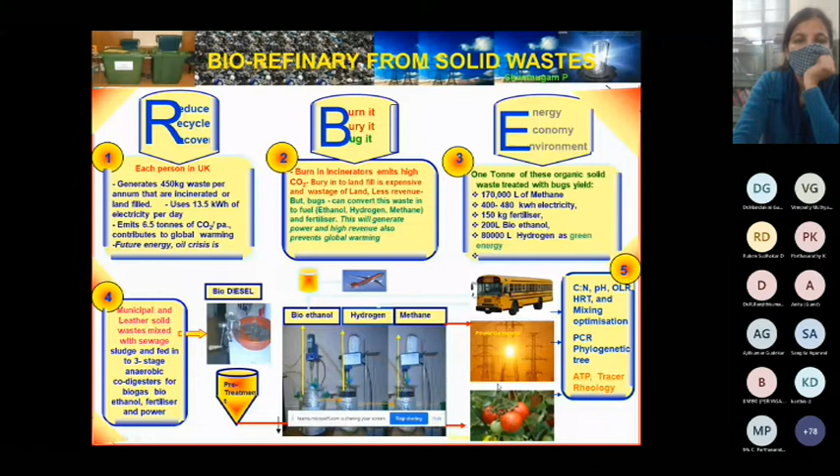So therefore, finally, these fuels, the biodiesel can be blended with the original diesel and be used in the cars and buses and automobiles. The bioethanol can be used in the automobiles, and the hydrogen can be blended together with the methane and can be used in automobiles, or separately also can be used. And the methane can be again used as a compressed biomethane.

Probably you all know many cities in India, we have demonstrated a lot of compressed biomethane plants. And that compressed biomethane plant is after purification of the biogas, and we enrich the methane by eliminating the carbon dioxide, and that becomes equivalent to a natural gas, like a compressed natural gas. It becomes compressed biogas. So therefore, this is the R cube into B cube into E cube concept that I have been demonstrating.

We are looking for any organic waste, it emits a lot of carbon dioxide if it is completely degraded or completely combusted. When it is completely degraded, only a very less quantity of carbon dioxide is released in the aerobic or in the anaerobic system. But when you are combusting in any automobiles, if you completely combust it, the end product is carbon dioxide. You might ask me a question, sir, ultimately efficient combustion leads to carbon dioxide. Inefficient combustion leads to carbon monoxide and unburned hydrocarbon, which is toxic to the human being.

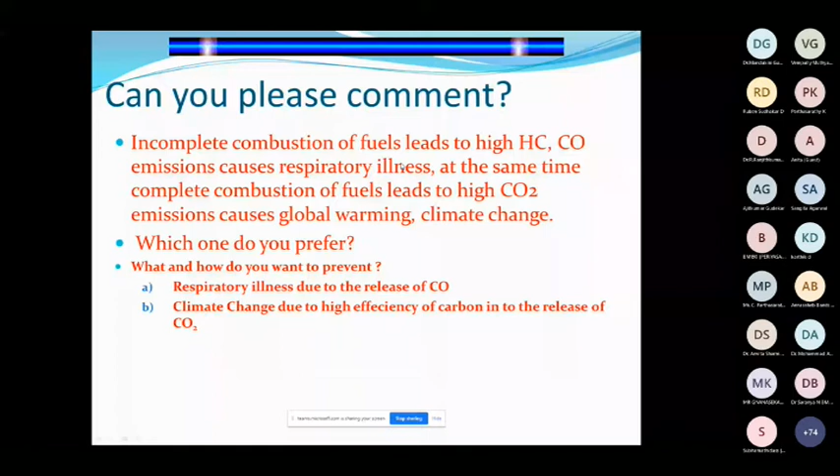Therefore, we must have a carbon neutral technology, whichever the technology, either it could be a biodiesel or biofuel or a bioethanol, or biohydrogen or methanol economy, or any kind of fuel production from the solid waste. We must look into a carbon neutral technology. That's the reason I'm bringing it down here. So how do you select the solid waste management or the wastewater treatment, on what basis? So normally, is the prime focus that you would develop the waste management system to achieve environmental compliance alone? Not only to achieve that. Is it only for revenue generation from solid waste management or wastewater treatment technology?

Not only that. There are PPP modes of solid waste management these days, because the electronic waste, the biomedical waste, and the organic solid waste, all these wastes have become a wealth, have become a rich revenue generating raw material. As a consequence, there are a lot of companies who have come forward to put it up as a public-private partnership mode these days. But I wouldn't say so. The PPP is a public-private partnership, but we must attempt PPP as profitably preventing pollution. So how do we prevent the pollution in a profitable way? Profitably preventing pollution is more important than the public-private partnership.

So we must look into what is the revenue-based waste management system. We must look into what exactly a revenue could be generated from each bit of the waste. Then only the waste management system could be attractive, and people will definitely follow it, because as a part of the management policy, we have a water tax and we have an air pollution tax for industries, and we are also going to have solid waste tax as a part of the cess tax.

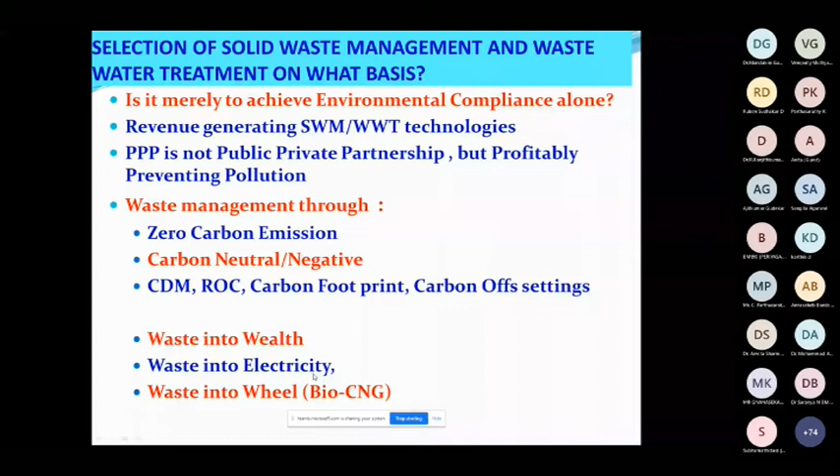So if you look at the natural greenhouse gas effect, when you do an open dumping of the waste, what happens? This waste, when it is putrefied, releases a lot of fugitive emissions of CO2. That unaccountable fugitive emission of CO2 becomes a big culprit for greenhouse gas emissions. Every city has got mountains of waste being dumped. In the rainy season, it is wet, bacteria come in contact, it gets degraded and emits a lot of carbon dioxide and greenhouse gases to the atmosphere. As a consequence, we got into a greenhouse gas effect.

And this solid waste also creates groundwater contamination, because in every city in India, or probably in the world, most urban dwellers are drinking distilled water in their homes. Why are we so? What happens after a few years if there is no mineral water available, no RO plant available? Which water are we going to drink if we already pollute the groundwater because of open dumping and leachate of toxicants from the open dumped waste into the groundwater?

After 10 years, it becomes a serious problem for groundwater resources if we don't protect ourselves through bioremediation of the leachate, bioremediation of the contaminated land, or bioremediation of open dumped land. In every city, there are acres and acres of open dumped landfill sites to be reclaimed or remediated to protect against groundwater contamination problems.

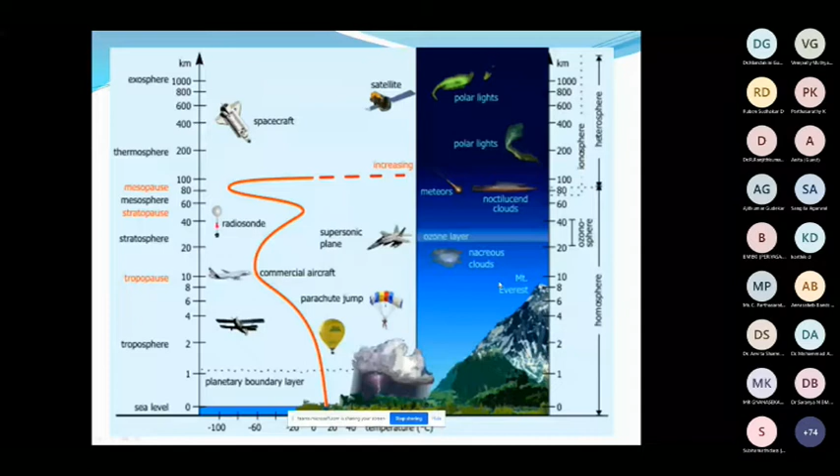So these are the pollution problems due to burning and greenhouse gas emissions. Of course, you might ask whether India is facing the greenhouse problem or not. You might see why frequent natural calamities are occurring, particularly in Chennai. Every December, there is a flood in Chennai. Every December or around this period, there is an earthquake in Indonesia. There are tsunami warnings.

Why is that happening so frequently in the recent past? We, the intellectual faculties and professors, all have to think it over and formulate technology to mitigate global warming, greenhouse gas emissions, and also the tsunami problem. I do understand tsunami and earthquakes are natural phenomena. But to a very meager percentage, we tend to presume tsunamis to be climate change related, because the occurrence in the recent past has become very frequent, which did not happen before. Hypothetically, it has not been proved that climate change is related to the tsunami problem.

I feel so. Whenever climate change happens, whenever greenhouse gas emissions are exorbitant and global warming takes place, as a consequence, the warming melts the frozen ice in the Arctic and the Antarctic.

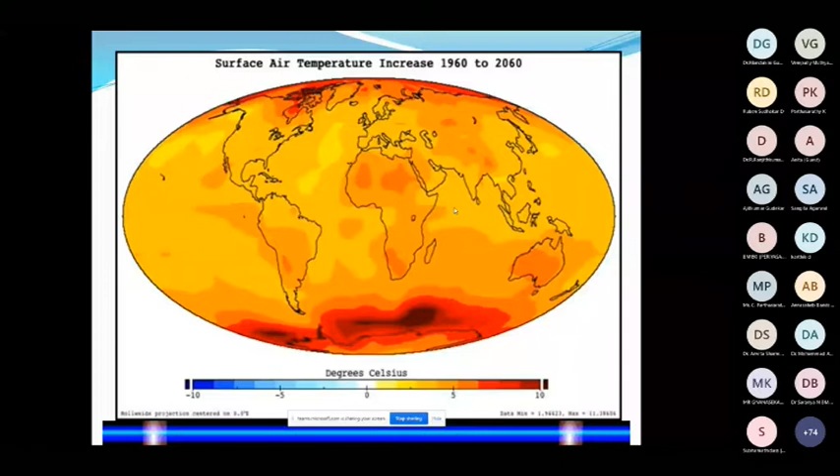because if the carbon is completely converted into energy, then the path of CO2 becomes very, very less, because most of the fuels are used in the process of automobiles, and therefore the CO2 emission is less. So that is what I normally consider and make a small relativity hypothetically between the greenhouse gas emissions, global warming, and the natural calamities.

and changing the conditions of the plants and animals, and more drought and wildfires occur, more precipitation in some places because of the greenhouse gas emissions, and stronger storms, stronger wind, stronger cyclones, and rising sea levels, and the earth absorbs more energy. So therefore, there are a lot of other imbalances in the energy budget. And that is the importance of the greenhouse gases and trapping this energy. So therefore, we have to balance the emissions of carbon dioxide and protect the earth through a balanced system.

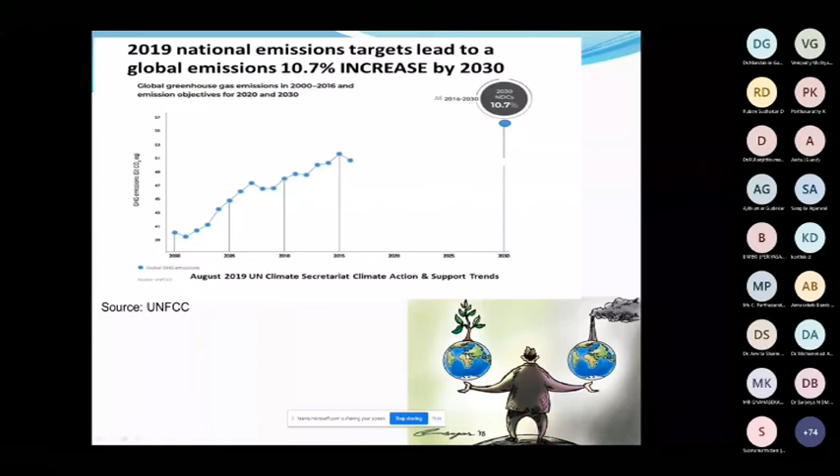So the CO2 emissions from the combustion process, and the CO2 emission from biogas combustion, it is relatively very, very low when we compare the CO2 emission from biogas, because ultimately somebody might feel that we are producing carbon dioxide, we are producing methane, and the methane during the combustion process is converted into carbon dioxide. How do we say it's a carbon neutral or carbon negative technology?

But when you replace the coal, because the burning of 1 kg of coal releases stoichiometrically 1.6 kg of CO2. But if you produce biogas, 1 meter cube of biogas or 1 kg of biogas is almost equivalent to 1.5 kg of coal. So when you are using the biogas for a combustion engine, IC engine, or for cooking gas, or as an automobile fuel, you are replacing the coal equivalent of 1.5 kg, which is equivalent to 1.9 or 2 kg of CO2 that you are mitigating.

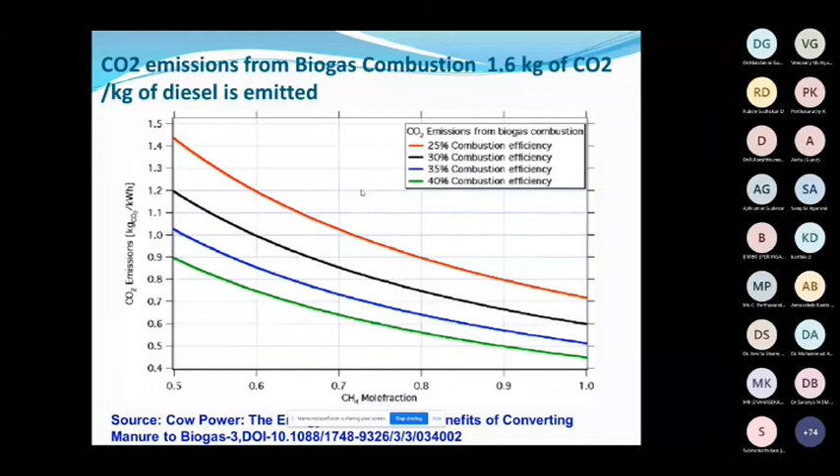So therefore, the indirect benefit of biogas production from the waste material is the reduction of the consumption of coal. And not only the reduction of the consumption of coal, but the coal equivalent CO2 emission in thermal power plants, we are able to mitigate it. That is the carbon neutral technology we could achieve. So that is the reason finally I say well-to-wheel comparison and waste-to-wheel comparisons.

So the CO2 emissions from the combined heat and power project, you all might feel, the biogas production, how efficient is it, is the first question you might have. I could have a good answer on that. And how combustion efficiency can be achieved, I will have a very good answer at the end of it.

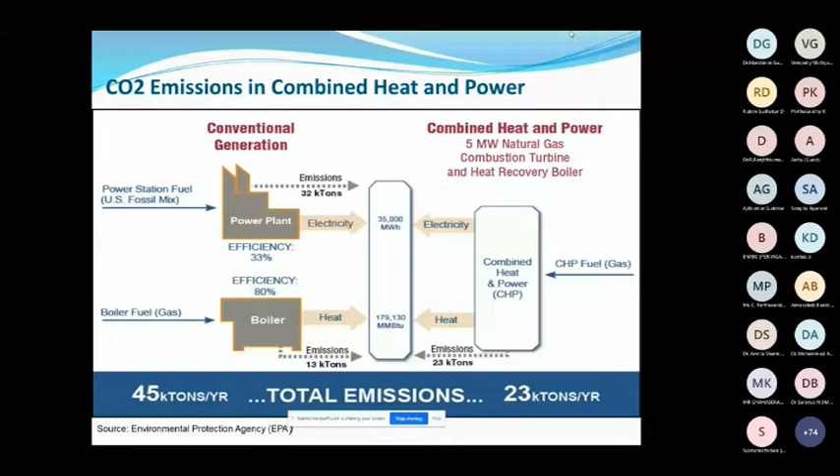And how the thermal conversion efficiency is comparatively better in the gaseous fuel than compared to the liquid fuels like petrol and diesel. So we could also discuss something on those issues. This is the CO2 emissions: this is the combustion, gasification, and pyrolysis. We have many techniques, but the CO2 emission in combustion is very high, and gasification is very high, and also

pyrolysis is very high. So carbon footprint calculations from electricity generation, from natural gas, from fuel oil, from LPG, from waste oil; then we can compare any renewable energy technology that we are going to adopt from the municipal and industrial solid waste, and then we can compare the carbon footprint. How much is the carbon footprint from these fuels? How much is the carbon footprint from the biogas, from the biofuel, from the biodiesel, ethanol, hydrogen, and methane? How much will be the carbon footprint we could calculate?

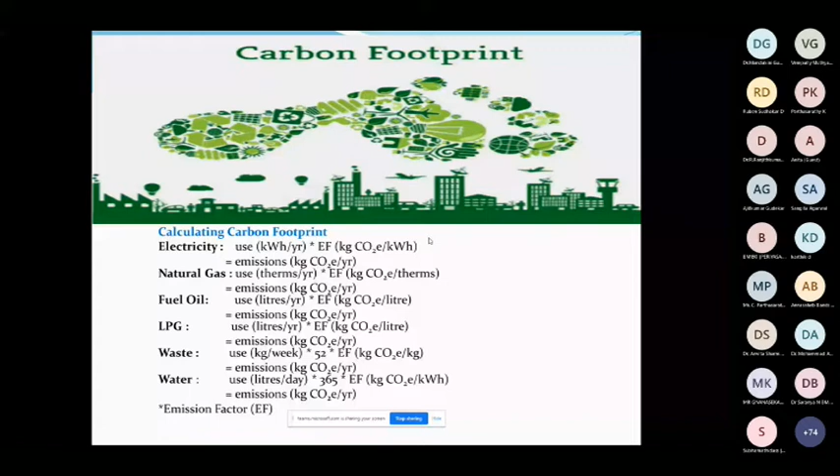And then subsequently, they brought the Renewable Obligation Certificate, ROC. The Renewable Obligation Certificate came in. It was wonderful. When landfill diversification happened, the waste, as much as possible, should go into renewable energy, converting the waste into biogas and renewable energy. That's what the Renewable Obligation Certificate is.

And later on, the next step, they came into the white energy strategy, because the waste can also be converted into CO2-free biofuel like hydrogen, because hydrogen is the white energy of the future and doesn't produce a lot of CO2. Therefore, they brought a white energy strategy.

Likewise, in India also, you have landfilling, you have composting technology, you have incineration, you have pyrolysis, you have gasification; so many waste management technologies are in practice. But what we should practice and what we should promote is which technology can fetch you a revenue, which technology gives you the benefit of revenue coupled with CO2 mitigation, and that technology becomes a carbon neutral technology. That's what I have been mentioning from the beginning.

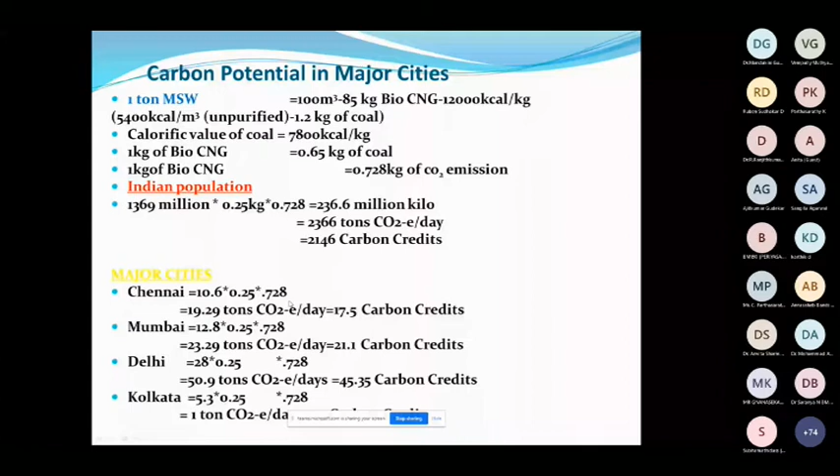For Chennai particularly, it is 17.5 carbon credits per day. And for Mumbai, Delhi and Calcutta, we have certain thumb rules for calculating the carbon footprint, and we have been explaining how to calculate it. So now I'm a little bit on the introductory side: whether gasification is good, or combustion is good, or pyrolysis is good, or biofuel recovery is good. Let us look into how the waste composition demands the technology, and which composition of the waste demands which technology.

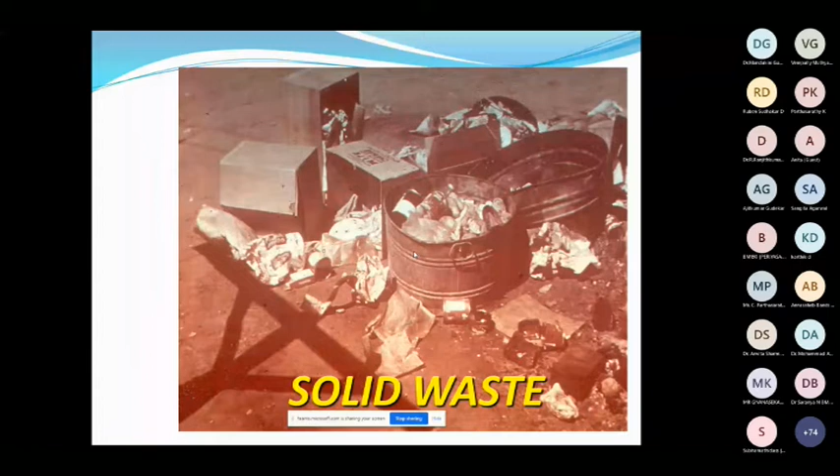And before we actually get into this, I request all of you to go through the Solid Waste Management Rules, Government of India, 2016, which is available from the Central Pollution Control Board. A PDF copy is available, and we all must be aware of the existing solid waste management rules being practiced at the moment in India. So this is what we look at as solid waste. Solid waste is of many categories: hazardous, non-hazardous, combustible, non-combustible.

There are leachable and non-leachable, corrosive and non-corrosive waste. There are many types of degradable and non-degradable, biodegradable and bio waste. Likewise, solid waste is prominently classified as combustible, non-combustible, degradable, non-degradable, corrosive, non-corrosive, radioactive, non-radioactive, and hazardous, non-hazardous.

In the waste category, there is electronic waste, plastic waste, metal waste, organic waste, bio waste, and biodegradable and non-biodegradable organic waste. Papers, rags, and many other waste materials make up the composition of municipal organic solid waste.

So when we look at it, the Government of India has very nicely promoted the integrated waste management park facility. What is called an integrated waste management park?

The solid waste needs to be segregated at the source. If not, the solid waste has to be segregated at the collection center where it has been collected in bulk. Once collected, it has to be segregated as metals, plastics, and so on, and each waste should go into a separate waste processing center.

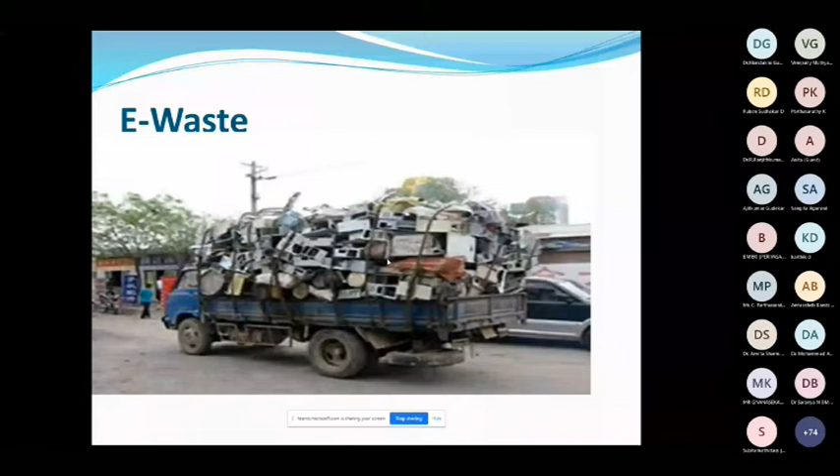We all must be familiar with the Solid Waste Act 2016, and know the environmental health problems related to solid waste, and methods of treatment: landfilling, incineration, open dumping on land or sea, composting, grinding or adding to sewage, and recycling. Integrated waste management is the system we need to know about.

The Solid Waste Disposal Act was very old, and the Solid Waste Management 2016 brought back every item in a very nurtured way to improve disposal technology, improve management practice, support research for new approaches to handling solid waste, and support training programs and federal assistance to achieve this.

I say we must support a training program because if all the municipal commissioners, joint commissioners, municipal engineers, and city engineers are well taught on how this solid waste management technology can be effectively achieved, then the percolation of the technology to the root level becomes very easy.

That's the reason around 2 years back, I conducted a waste management technology training in our institute - laboratory training as well as in-house class training, and also field visits - for 124 municipal commissioners and municipal engineers of the Government of Tamil Nadu.

Since then, the Government of Tamil Nadu, most of the municipal engineers—almost 144 people—attended our institute, and they all benefited greatly about how waste management, particularly waste into biofuel, can be effectively done, and what are the bottlenecks involved. It was a 3-day training program we organized for all the commissioners and municipal commissioners of the Government of Tamil Nadu.

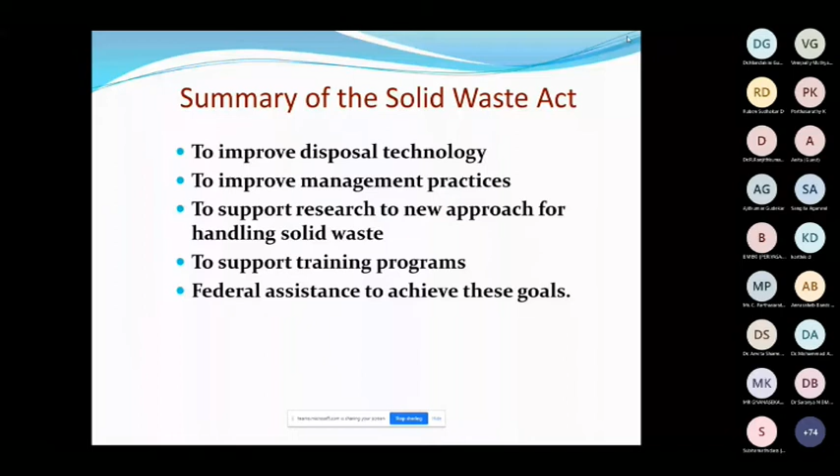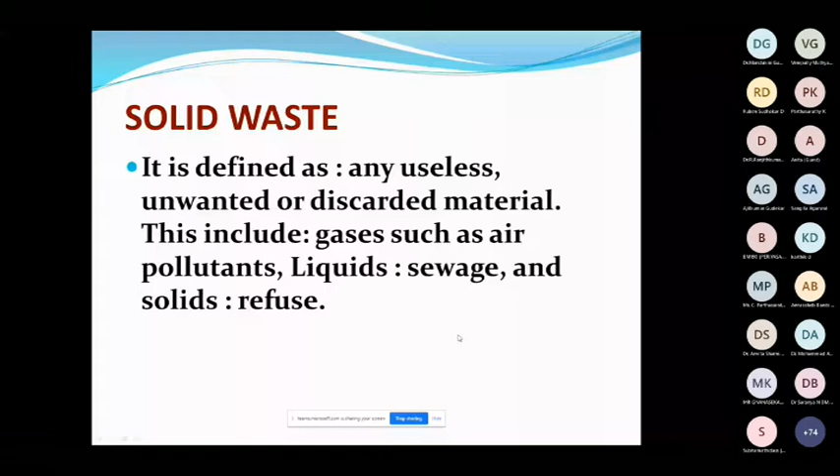Solid waste includes sludge as well, since it comes from the sewage treatment plant. There is a lot of hazardous and non-hazardous waste, and biodegradable material—waste material capable of being broken down biologically or by biological enzymes is called biodegradable. And of course, there's garbage.

And industrial waste—source reduction is one of the most efficient methods of reducing material before it becomes waste.

When I was in England doing my PhD for 5 years, I noticed a market called the flea market, where there was a car boot sale, but I haven't found any old material sale market here. The flea market, and the old car selling market, are prominent there, but not something like an e-waste or old computer market.

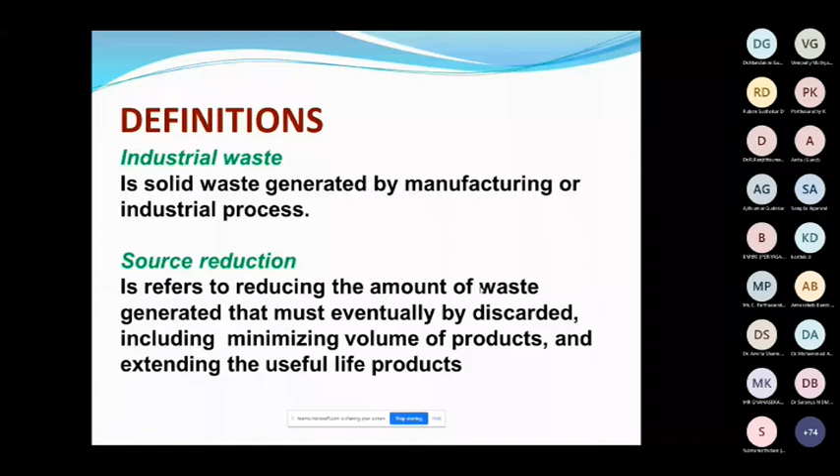Old e-waste markets haven't been generated here. So if all waste materials—particularly e-waste—generated in a month could be collected in one place and resold to those who need it, people could take it, process and modify it a little, and reuse it. Therefore, waste reduction at source is one of the important systems we must follow.

The leachate from the landfill is a very important problem to be addressed, and of course, municipal solid waste as well.

This is why I said the municipal engineers and municipal commissioners training program is one of the most important concepts we must achieve. In most cities, the per capita waste generation—whether 0.4 kg per person per day, or 0.3, 0.6, or 0.8 kg—what is the actual per capita waste?

For liquid wastewater, the per capita wastewater generation data is available everywhere, because the Metro Water, PWD, and municipalities have taken an efficient role in developing underground drainage systems and making sewage treatment plants functional. But for solid waste, many cities don't have proper data on the exact per capita waste generation, or the per capita organic fraction of municipal solid waste generation. Most cities don't have the exact data.

So this training program can not only serve as teaching and dissemination practice for municipal engineers and commissioners, but can also guide them on how to conduct a waste collection and waste inventory survey—called a source emission inventory survey—door to door, to arrive at the per capita waste generation in a particular city, what data existed before, and what mistakes exist in each city's data, if you can find out. That would be wonderful data.

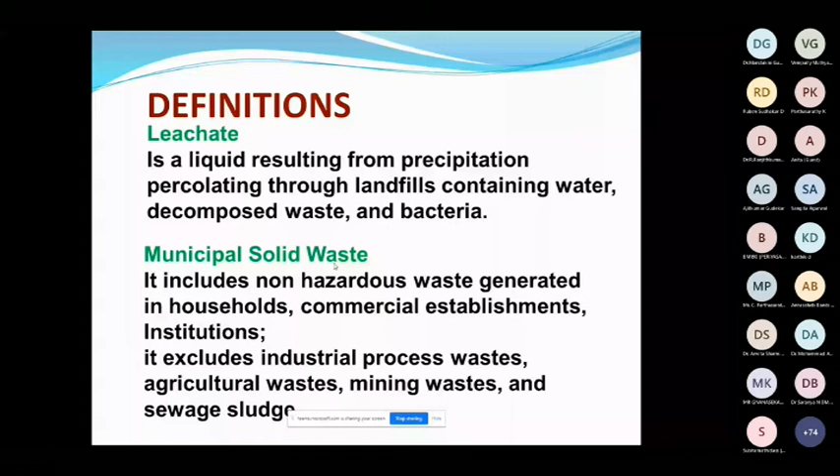And of course, recycling and refuse: a lot of refuse-derived fuels are being produced, briquetting, refuse-derived fuel, using sludges and solid waste for road construction and building construction, low-cost construction materials. Many kinds of waste are being practiced in many ways.

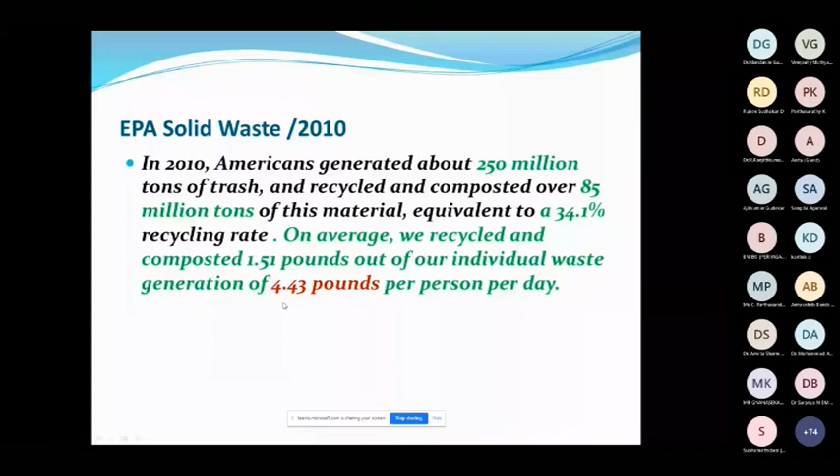The sources of solid waste are agricultural waste, mineral waste, industrial waste, and municipal waste. And of course, the EPA Solid Waste Management 2010 classifies types of waste: food waste, plastic waste, woods, rubber, textiles, metals, yard waste, paper waste, and others.

So you can see it prominently: 30% of the waste is paper, food waste is 14%, plastic is 12%, wood, rubber, and textile is 14%, metals are 11%, yard waste and agricultural waste are 9%.

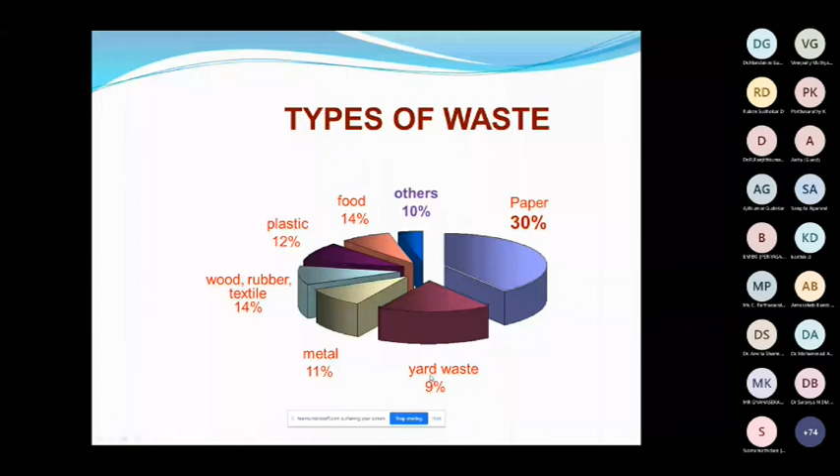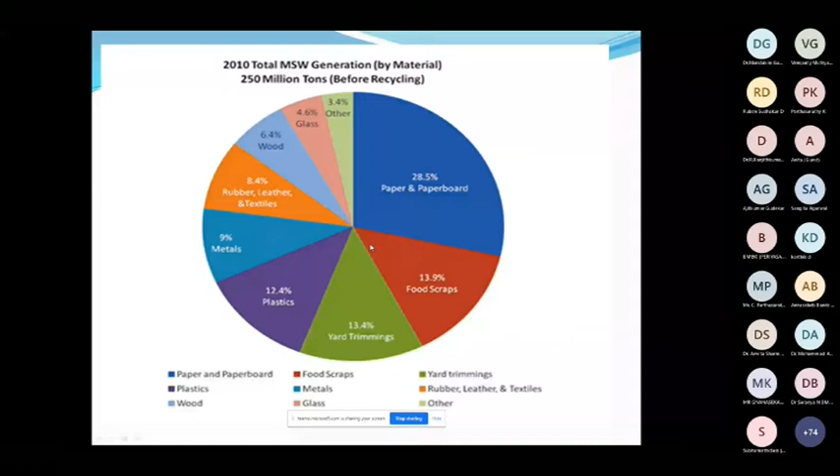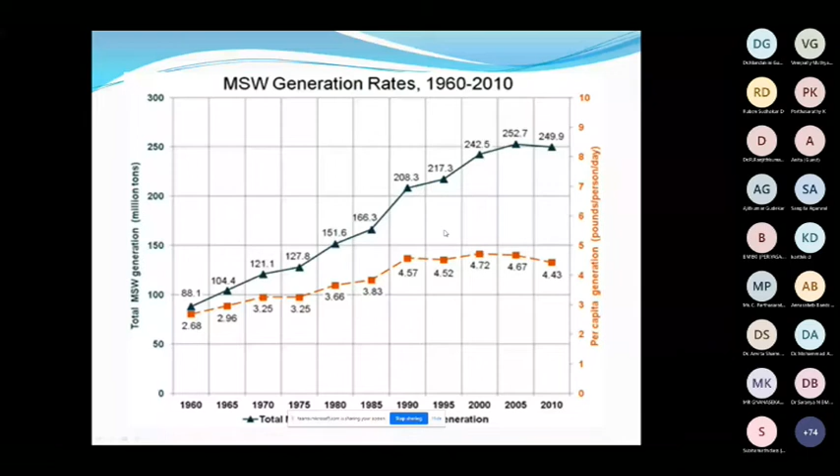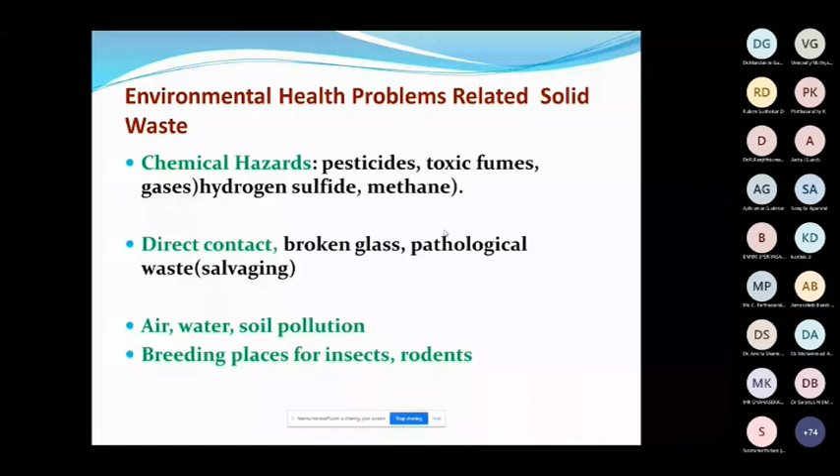There are chemical hazardous waste and non-hazardous waste. The treatment and disposal methods include sanitary landfill methods and engineered landfill methods. It is the most economical option if land is available at a reasonable price. However, if the waste contains more organic material, I would prefer biofuel recovery or other material recovery.

So what are the disadvantages of sanitary landfill? It requires a top daily cover which might be costly. There's water and air pollution, and it becomes a breeding place for mosquitoes, and so on.

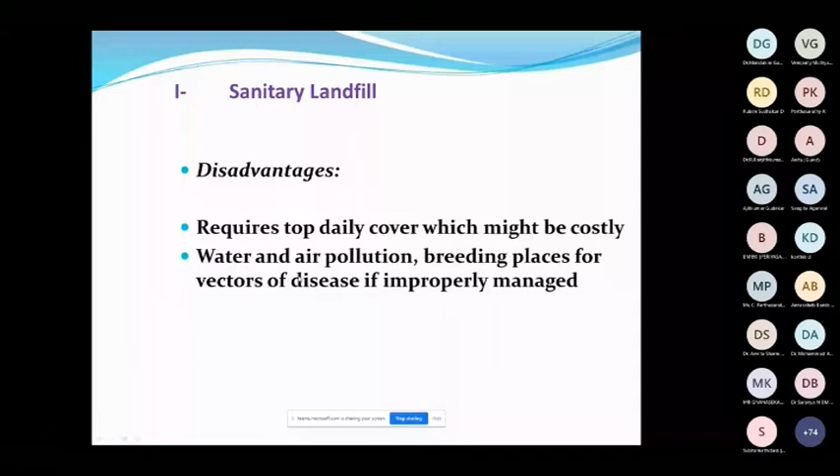You can see how the landfilling system has methane flared from the landfill, and groundwater monitoring checks how to mitigate groundwater contamination potential from the landfill, whether the landfill leachate barrier is adequate to prevent leachate or not. Every groundwater source near the landfilling area must be tested and monitored to check whether leachate contamination has polluted the groundwater.

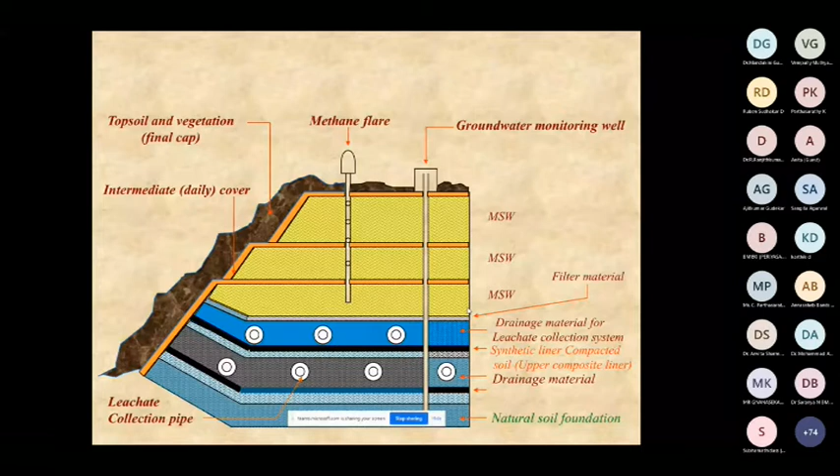Next is incineration. The temperature needed is something like 600 to 800 degrees, which is the major bottleneck. Of course, for biomedical waste, there is no other way than incineration or autoclaving, and that's what's being followed now.

Advantages can be very efficient: decreased waste volume, can be located close to residential areas, safe transportation costs, and sources of energy such as steam become useful from them.

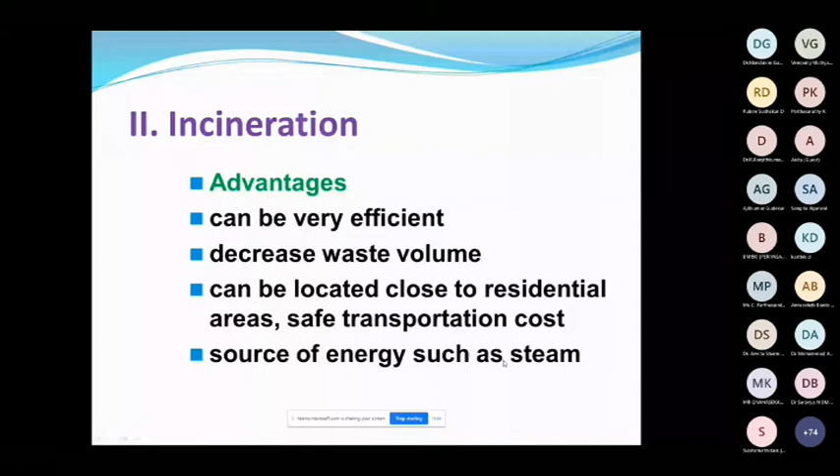Disadvantages: it generates huge air pollution. Ashes must be considered hazardous waste due to high contents of metals. Of course, we have fluidized reactors to collect all the flue gases and sulfur recovery systems. All these are prominent these days, along with high capital investment and expensive operation and maintenance.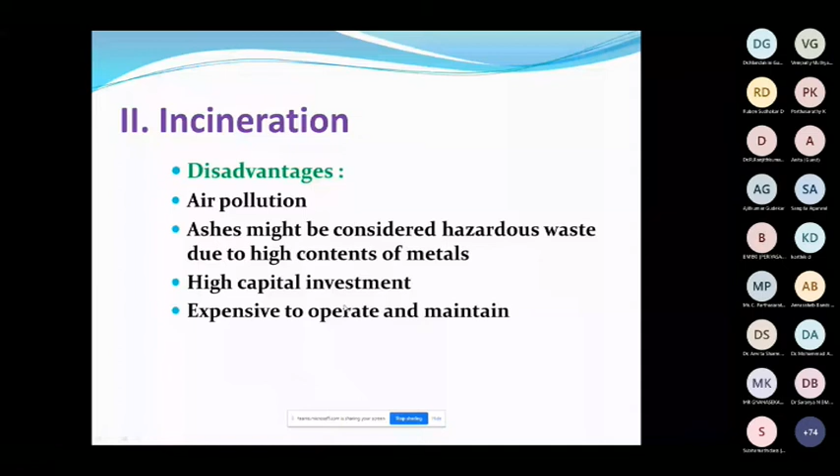Open dumping is all too common, and we should not practice it these days, because it leads to legacy waste management issues - waste that has already been dumped over hundreds of years is called legacy waste. This legacy waste management, if addressed, can be taken through a biomining system. Nowadays most cities have a beautiful biomining system management, well practiced, converting most of the waste into manure, and biomining has become a very attractive technology these days.

Open dumping is, of course, illegal and creates an environment optimal for breeding of rats, insects, and so on, along with fires, air, and water pollution problems.

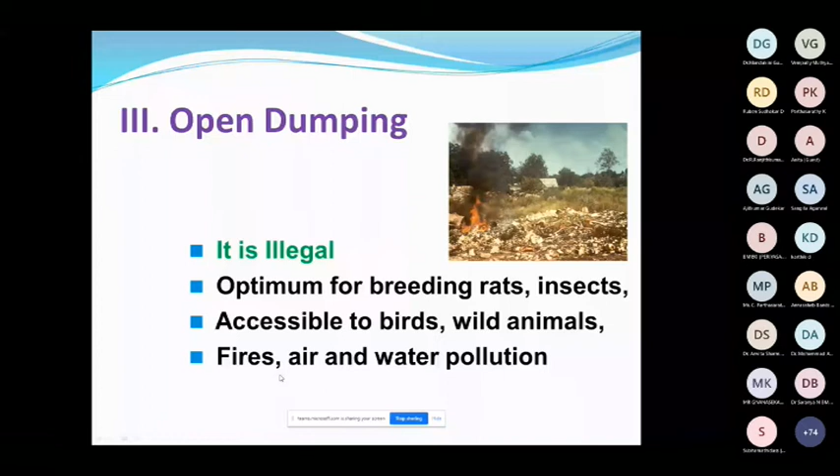Composting is a controlled biological decomposition of organic solid waste under aerobic conditions. There are in-vessel composting, windrow composting, and many other composting technologies available, including micro composting. Particularly in the government of Tamil Nadu, most districts practice micro composting. I've also seen very good micro composting in Goa, and Maharashtra and Madhya Pradesh have beautiful micro composting technology as well.

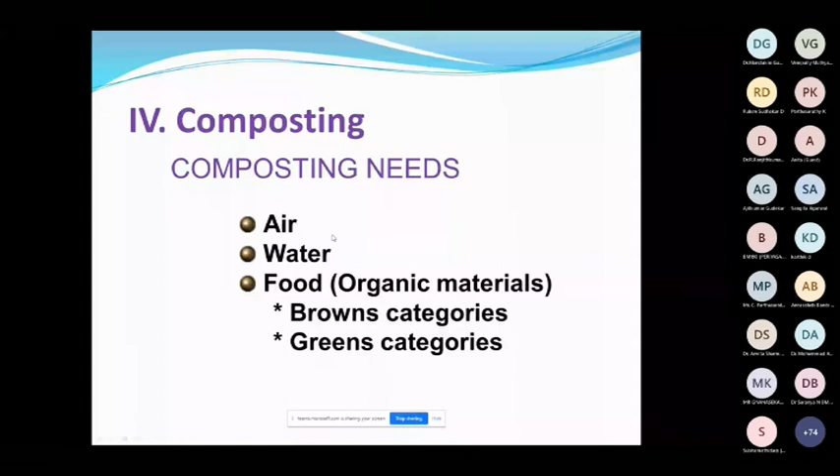The composting needs air because we need to completely aerate it to avoid foul odor and to convert high oxygen input for aerobic degradation. Of course, water. We have to trap the water because the heat produces water, and condensed water we need to trap and take out. And what to compost? Grass, lawn clippings, hay, kitchen waste, leaves, manure, straw, weeds and other garden waste, wood chips and sawdust.

You might ask me why we should put this directly into a composting unit. Why not go for a biogas plant? And how do you prioritize which technology to go for? In my opinion, even the rice straw and the wheat straw, which are highly cellulosic and hemicellulosic waste, the first prioritized technology would be biofuel production, because there are a lot of technologies converting rice straw and wheat straw into ethanol, wheat straw into biogas, into so many other materials and other biofuels. Therefore, I would say biofuel conversion could be one of the very effective technologies.

And stubble waste management, as you all know, Delhi's air pollution problem is partially contributed by stubble waste from elsewhere flowing into Delhi, and the stubble waste contributes a high quantum of the urban air pollution problem in Delhi. And the stubble waste should not be burnt.

And we can make an alternative technology of biogas production from stubble waste, because we have been attempting a lot of work on cellulosic and hemicellulosic hard waste, because cow dung based biogas production is not such a big advanced technology. Food waste into biogas is not advanced, but biogas from leather solid waste and other solid waste is important for contributing such high biogas production. Therefore, these need to be avoided.

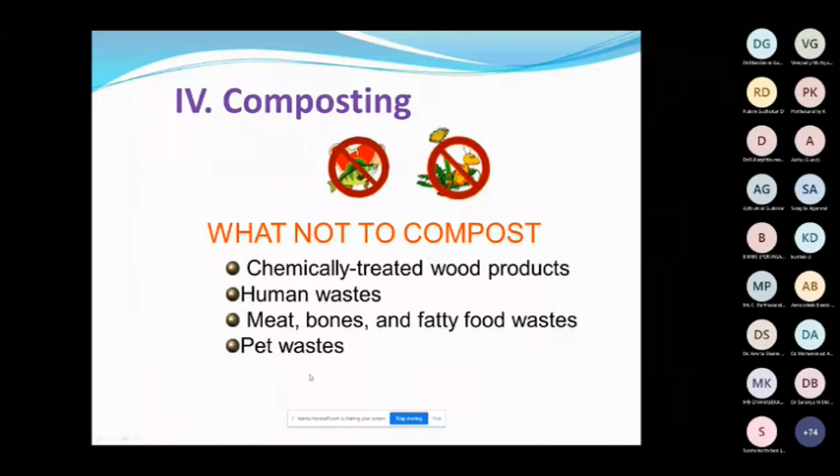So composting systems: 1 bin system, 2 bin and 3 bin systems, rotating or tumbling system, sheet or trench system, commercially available bin system, in-vessel composting system. There are many kinds of windrow composting system. The rotating or tumbling system is called windrow composting system. The 1 bin system is called a micro composting system.

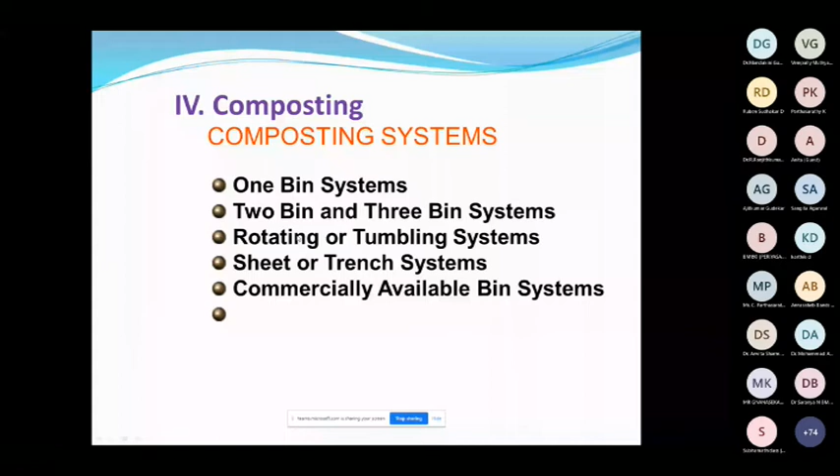Perhaps vermicomposting has become one of the important technologies in the recent past, but vermicomposting has not been well adopted because of high rain conditions. It gets washed off, and worm production is not adequate during the rainy season. Grinding and adding to sewage is an acceptable method of garbage disposal, recommended from the convenience and public health standpoint, but the disposal of other refuse remains to be handled. And it adds to the BOD load of the sewage treatment plant.

Hog feeding. Pyrolysis, as applied to solid waste with metals and glass removed, is an experimental thermochemical process for the conversion of complex organic solids in the absence of added oxygen to water, combustible gases, and tarry liquids.

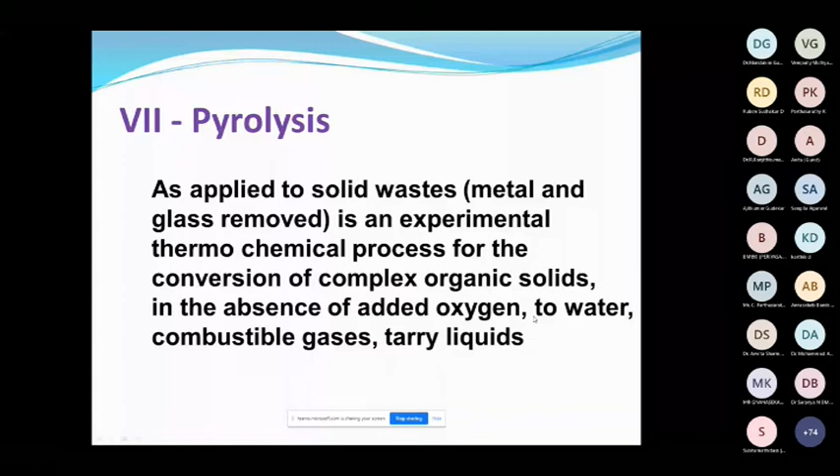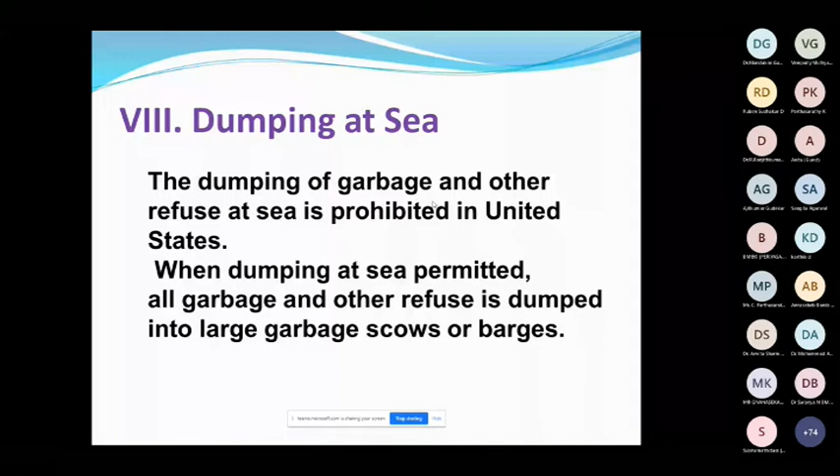So of course, finally, I've come into recycling. It's a resource recovery method. That is the ultimate goal of my topic; I'll come to it in another 5-10 minutes. It's a resource recovery method from these solid wastes as biofuel, because that will attract the future, the profitable pollution-preventing technology in the future.

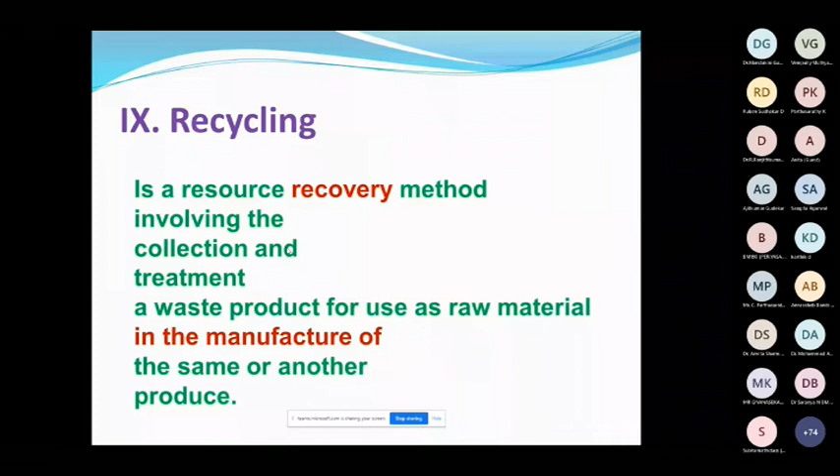So this is the waste, and these are some of the e-waste management practices. People must concentrate on all the computers and electronic waste like mobile phones, cell phones, telephones, and so many electronic goods. When it is condemned, it needs to be handled practically. Particularly the phones which contain batteries are to be managed very safely and efficiently. These are some of the e-waste management practices.

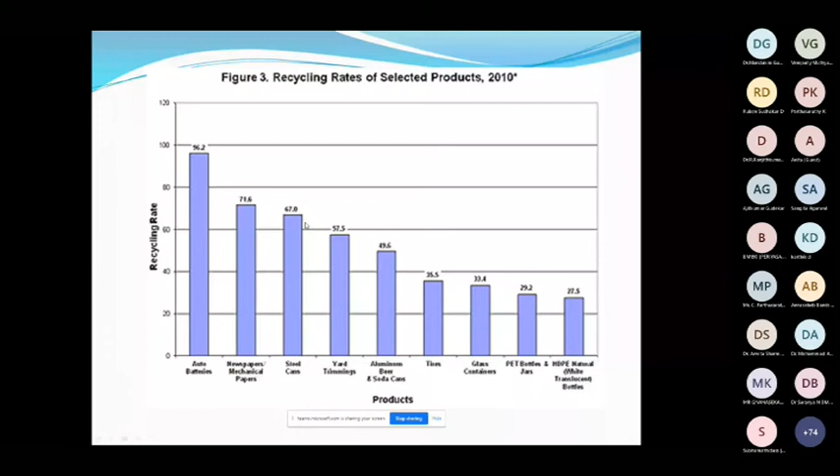You can see here chips and boards of electronic circuit boards are collected and used, and separately generated e-waste. It's harmful to human health, and they take out the chips and can use them elsewhere. So of course, some of the recycling of the materials, like auto batteries, newspapers/mechanical papers, steel cans, yard trimmings; all of these are problematic. So now the reduce, recycle, incineration and landfilling system.

So now we are actually going into the biofuel recovery system, production of biofuel and other biofuel technology, which is the actual core of my R&D topic for the past 30 years of my CSIR service. I would be very happy to present what I have been doing on biofuel recovery, how this municipal solid waste is being effectively managed, and what system adaptability we must introduce into Indian waste management practice.

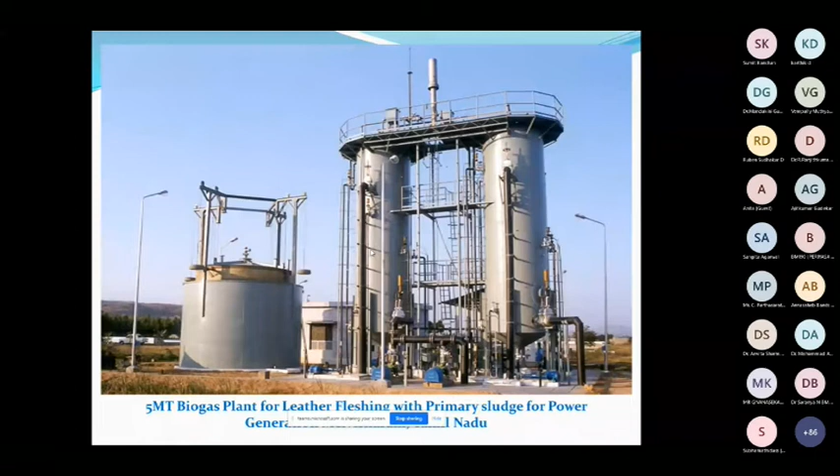payback period-based technology, bank guarantee-based technology. So nowadays, people are taking a lot of loans and going for bank guarantee-based biogas technology. So people are looking for technology where, per ton of the organic fraction of municipal solid waste, minimum 80 to 100 meter cube of biogas should be produced, not only 40 or 30 meter cube, because it is not for the waste disposal problem, it is for revenue generation. That's the reason the technology should fetch a high quantity of biogas out of each bit of solid waste. And this is the Melvisharam solid biogas plant.

This is the waste dumping yard, and there is a mechanical mincer here. It minces it into a paste, admixed with the CETP primary treatment sludge, and both together are fed into the anaerobic digester. This is the hydrolyzer, and this is called the methanizer. In the hydrolyzer, whatever solid waste is put inside is converted into volatile fatty acid, which is a precursor for methane production. The first stage of hydrolysis is only a solubilization or liquefaction process, where protease or lipase enzyme is added, and these enzymes convert the organic solid waste into a liquid fermentable volatile fatty acid.

And when we feed the next day, because of the high density of the fresh feed, it settles at the bottom and displaces an equivalent liquid quantity of 2 meter cube or 2 tons per day, which goes into the secondary digester called the methanizer. So in the methanizer, the substrate is volatile fatty acid, which is completely converted into methane, and the methane goes through the gas pipeline into the gas holder. And you can see the gas holder, the condition at the top.

The engineering design of the gas holder is such a wonderful task. It has got a breather valve at the top. And the breather valve is like a cooker in the home, like a rice cooker. Whenever the gas pressure is more than the designed pressure, the whistle or the top portion of the cooker will automatically open and release the gas, and it doesn't make any safety problem there.

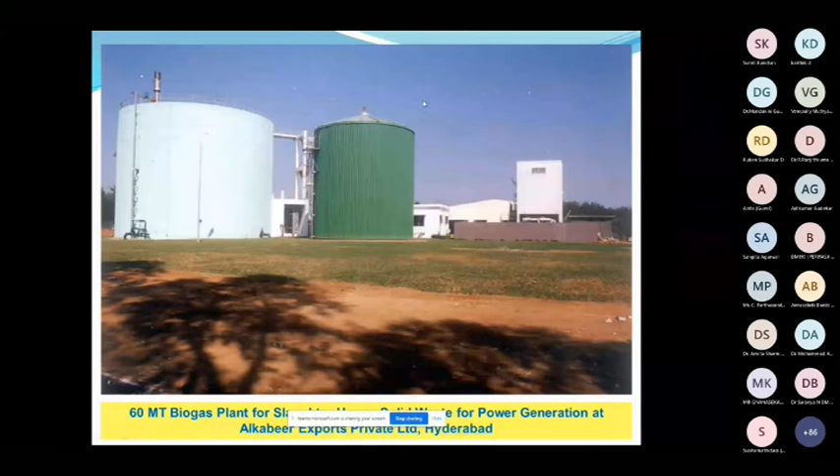We have learned whether gas mixing, impeller mixing, or centrifugal mixing is worth it, what should be the dispersion number, Peclet number, residence time distribution analysis of a digester, the computational fluid dynamics of the digester, and how we should design the digester based on the RTD and the computational fluid dynamics properties of the rheology system inside.

Because as we increase the loading of solid waste into a high rate digester. These anaerobic digesters are classified as high rate, standard rate, and low rate digesters. In what we call a high rate digester, a high organic loading rate or high solid waste is fed at a shorter retention time.

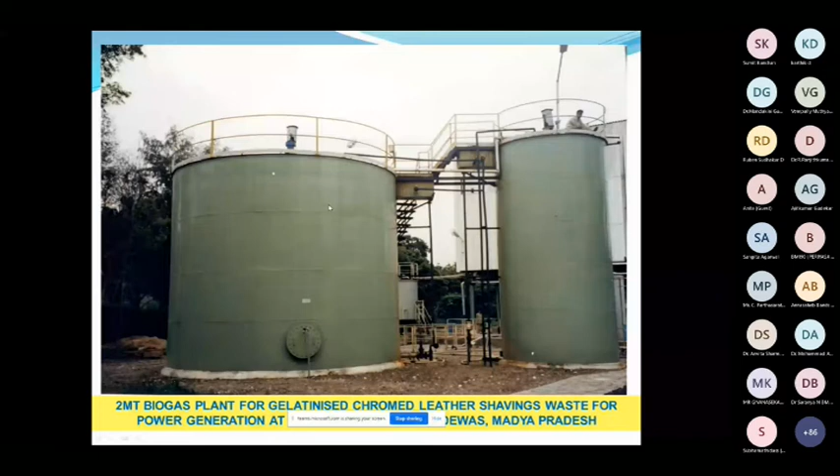So when we are feeding into a high rate digester with a shorter retention time, obviously what is more prominently a problem is the mixing; viscosity becomes higher inside the digester, and the rheological properties become improper for high biogas production. Therefore, we work on the RTD, residence time distribution analysis. We work on the dispersion number. We work on the Peclet number. We work on the computational fluid dynamics part of it to design the appropriate digester based on the desired organic loading rate and the engineering kinetic constants of the digester.

So this is the Koyambedu biogas plant for the 60 tons per day of the Koyambedu vegetable market complex waste, and the waste is collected and put into here, and there's a rope. It collects the waste from the bin, and the bin brings it into the conveyor. When the waste is put into this conveyor, the metals, which are heavy, go back and are collected at the metal trapper, and the organic waste goes into the mincer, and the mincer is mincing, pulping, and it gets liquefied and added with the sewage treatment plant wastewater, and both are minced together, pulped together, homogenized together, and put into the digester, because it's a BIMA digester.

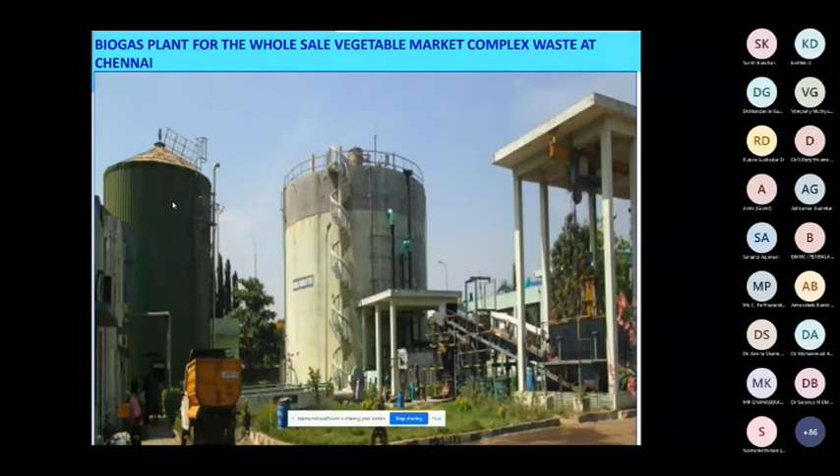And when it is hydrolyzed, slowly the hydrolyzed product comes into the methanizer, which is an outer digester, where the methane production is done, and it gets converted, is stored in the biogas storage tank, and then it is used for electricity production. And this is a small mincer, you can see here. The mincer minces the solid waste into a small size without much electrical cost involved.

And this is our biorefinery plant, because I've been telling from the beginning, instead of producing one fuel as biogas, because leather solid waste contains a lot of fatty material, the fat can be converted into oil, and the oil can be transesterified into biodiesel. We have used the fat content of the leather solid waste before disposal for a transesterification process. And this is the biodiesel plant that we have built for Ranipet in Vellore district. There is a Ranipet common effluent treatment plant, and that's where we have introduced the biodiesel recovery plant, followed by biohydrogen, methane, and ethanol plant, where you could see the digester construction is going on, and it has almost completed. Last week I've been there.

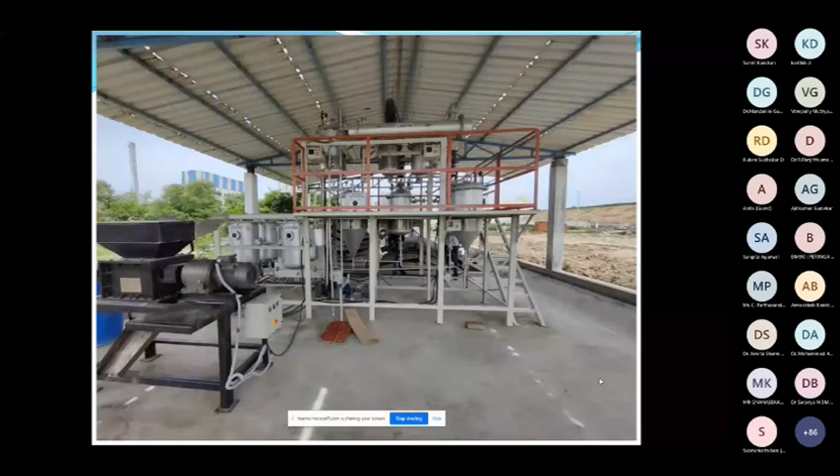This is the hydrogen plant, and this is the methane plant, and it has been built well, and the recent photos I have not been able to take. And now we are going to commission the plant producing ethanol, hydrogen, and methane, because we have seen already the biodiesel. The 2 tons per day of tannery solid waste we'll be using. The residue of the biodiesel plant will be taken to a bioethanol plant, hydrogen and methane plant, and the final residue will be taken to a filter press, where the cake will be converted into agriculture fertilizer, and the liquid will go back into the common effluent treatment plant.

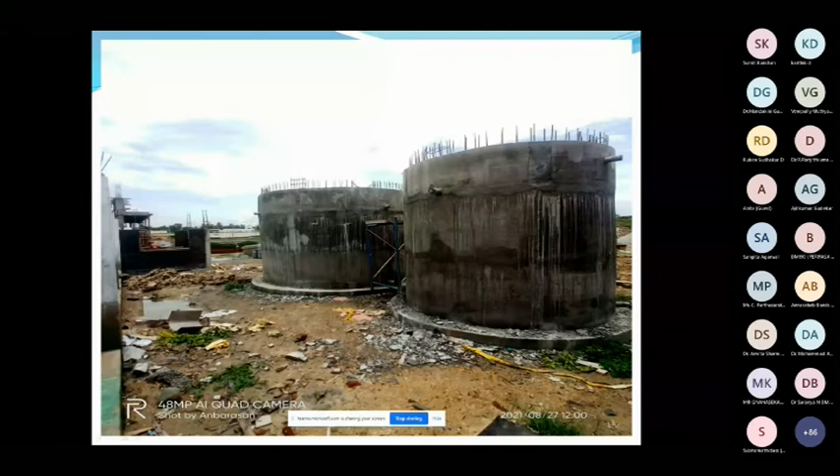And these are some of the studies I did, because mostly we do a lot of pre-feasibility study. It's not that we straight away prepare a detailed project report, DPR, or the design configuration or the engineering details for any waste into any biofuel recovering technology. Primarily, we will be doing a laboratory bench scale study, and a little piloting study on 10 liters per day, 100 liters per day. And then we understand the feasibility of producing biodiesel, ethanol, hydrogen, methane per ton of the solid waste, and what engineering configurations are required.

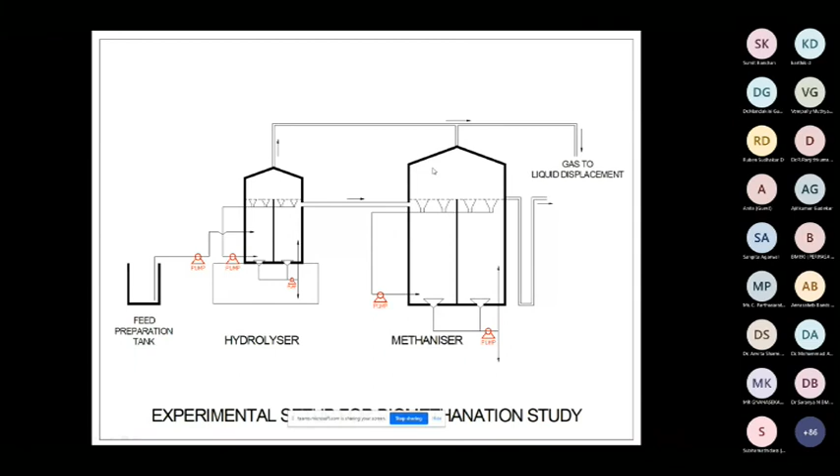And then we prepare a detailed project report and give it to the client, that your total waste of say 100 tons or 50 tons will yield this range of biodiesel, ethanol, hydrogen, and methane. That's how we prepare a DPR based on the pre-feasibility study done in the lab. And these are all the pre-feasibility study reactors, like hydrogen and methane reactors. And this is what the biorefinery is to achieve: biodiesel, bioethanol, biohydrogen, and methane. And we have a pilot plant also in the laboratory.

For anybody in need of it, we conduct a pre-feasibility study using the pilot plant. And this is the biorefinery plant.

Tannery solid waste, either through autoclaving or thermal recovery or enzymatic method, we collect the fat oil. And the fat oil contains fatty acids like oleic acid, linoleic acid, palmitic acid. All these fatty acids are there.

So the free fatty acid, total free fatty acid, is the major controlling parameter here, where if the FFA is very high, then we go for a 2-stage transesterification process.

If it is very low, then we go for a transesterification process and convert into biodiesel, used in petrol pumps after purification. Because during biodiesel production it contains a lot of solvents, and the solvents need to be purified and taken off.

Otherwise, the fatty acid ethyl ester, which is biodiesel, or the fatty acid methyl ester, the biodiesel will be intact in there. So that's how we try to eliminate it after purification.

And then the bioethanol - whatever residue it contains, the residue goes into a bioethanol plant with the CETP seed sludge. That's an innovation of our bioethanol plant.

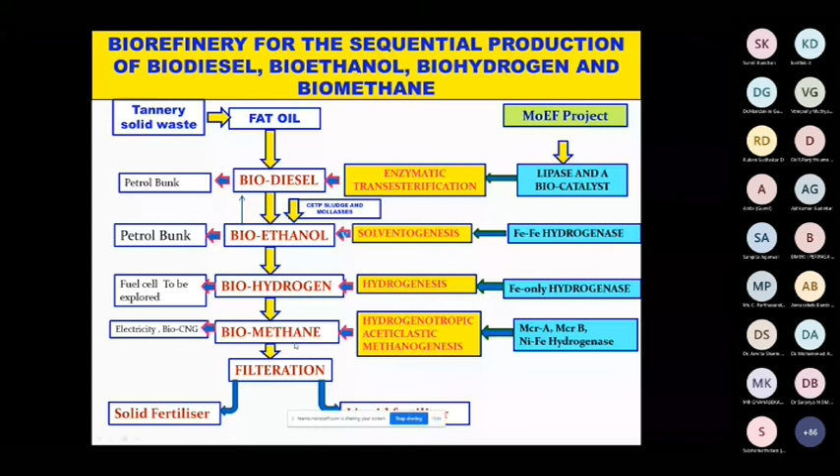So this is the biorefinery plant, a renewable energy product. Biofuels - biodiesel, bioethanol, biohydrogen, and biomethane - are the products for energy, economy, and environment, as I mentioned initially.

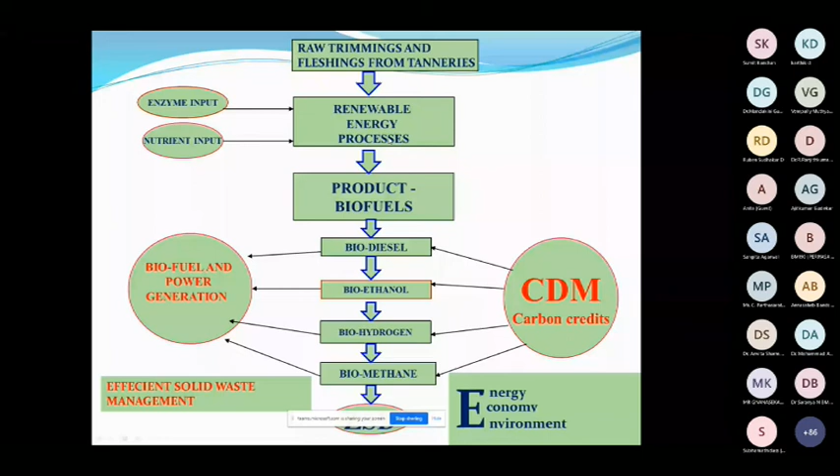This is the typical Ministry of Environment and Forest 2 tons per day biorefinery plant. It's a 1.1 crore project, a pilot plant, and we have built a demonstration plant at Ranipet.

And this is the tanneries - they have 70 tanneries. We collect the solid waste, not from all 70 because it's only a pilot plant. Almost around 100 tons of waste is generated, but we are using only 2 tons as a demo plant.

That tannery solid waste, we collect it, wash it, clean it, and take out all the dung and other materials in there. Then we take it into a heating enzymatic tank to hydrolyze and collect the fat oil.

And then we use the fat oil in the biodiesel trans-esterification tank and convert the fat oil into fatty acid methyl ester, which is nothing but the biodiesel.

And then that will be taken to a centrifugal tank for purification with a water wash, to take out all the excess solvents or excess alcohol in there.

And then afterwards, we send it directly to the petrol pump, and they can blend it B20 or B30. They can use it in various generators or directly at the petrol pump at various blending ratios with diesel, alkyl diesel.

Then the residue goes into the ethanol plant, where the ethanol plant produces ethanol. As I told you, it has a specific seed inoculum, where we adopt the ethanol solventogenesis process in the lab and make it a perfect ethanol recovery system.

And that ethanol is fractionated, collected, distilled, and taken for the petrol pump. And the residue is taken into a hydrogen plant.

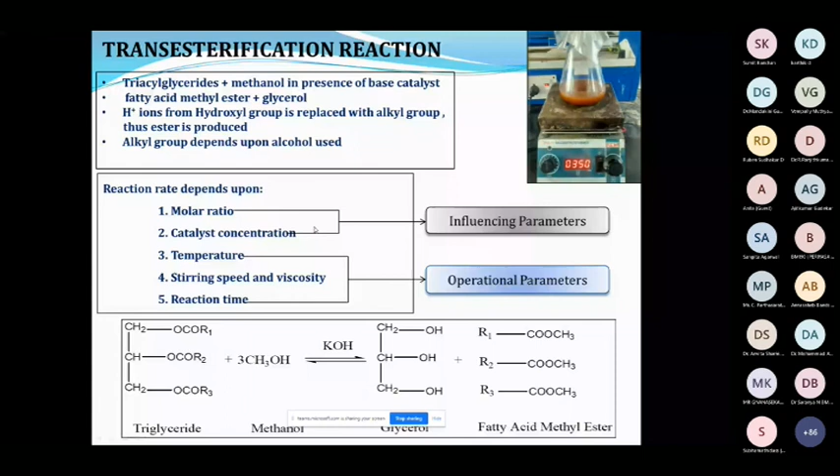And this is the methodology for extraction of oil and fat. It's a small fat recovery system where we recover the fat oil, and the fat oil is used for trans-esterification to convert into biodiesel. So this is the various methods of optimization.

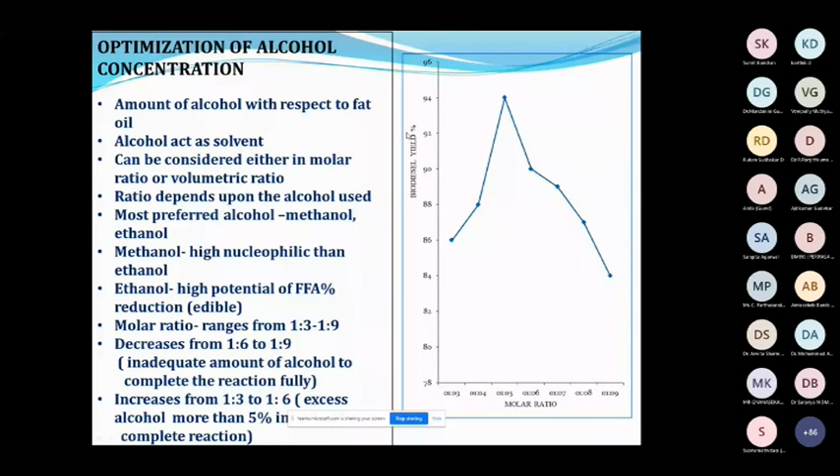This is a various method of optimization, including temperature and other methods that we have optimized.

This is how the biodiesel is separated, since the end products are biodiesel and glycerol. The glycerol settles at the bottom, biodiesel is recovered separately, and then we purify it.

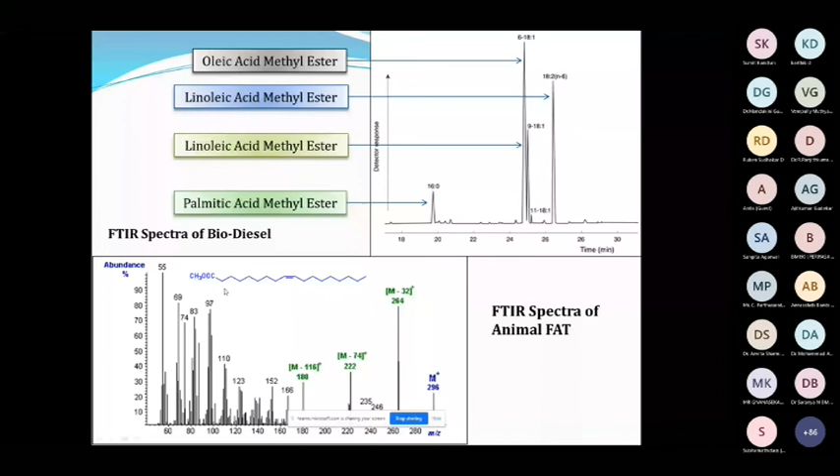This is the confirmation test using FTIR spectra, showing how this biodiesel can be confirmed against standard diesel. This is the FTIR data, and these are the free fatty acids.

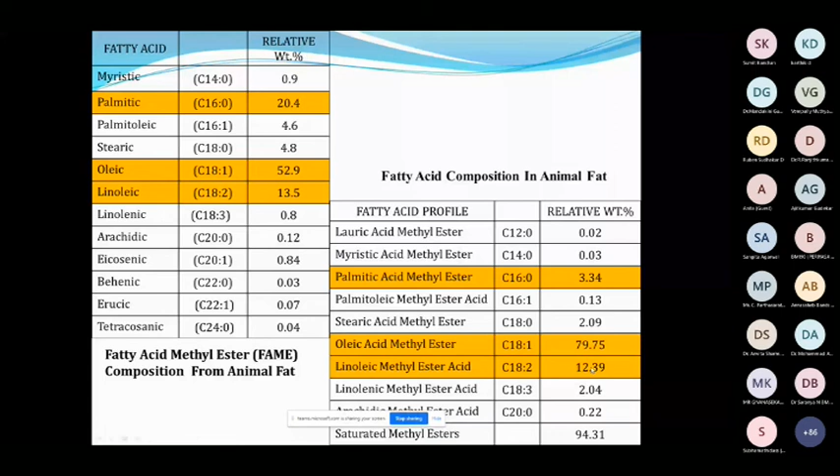What acids does it contain? Myristic acid, palmitic acid, stearic acid, oleic acid, and linoleic acid. These are the free fatty acids it contains for conversion into biodiesel. This is the animal fat free fatty acid composition: palmitic acid is 3.34%, oleic acid methyl ester is 79%, and linoleic acid is around 12%. So oleic acid is the maximum, followed by linoleic acid, as the major components in the animal fat.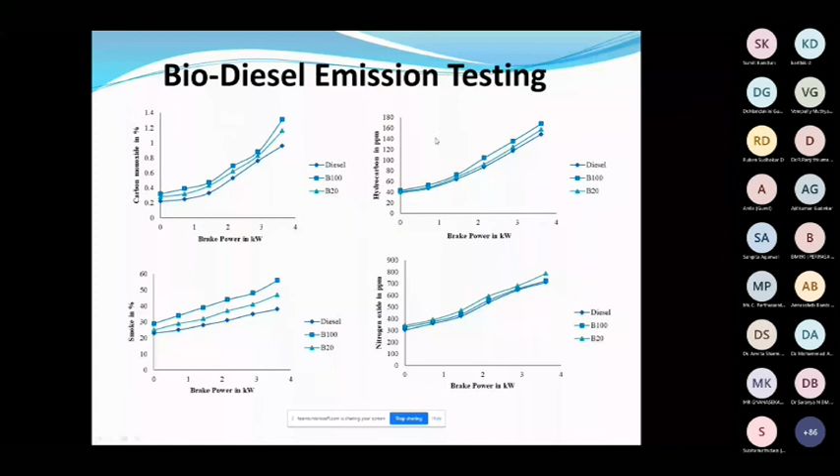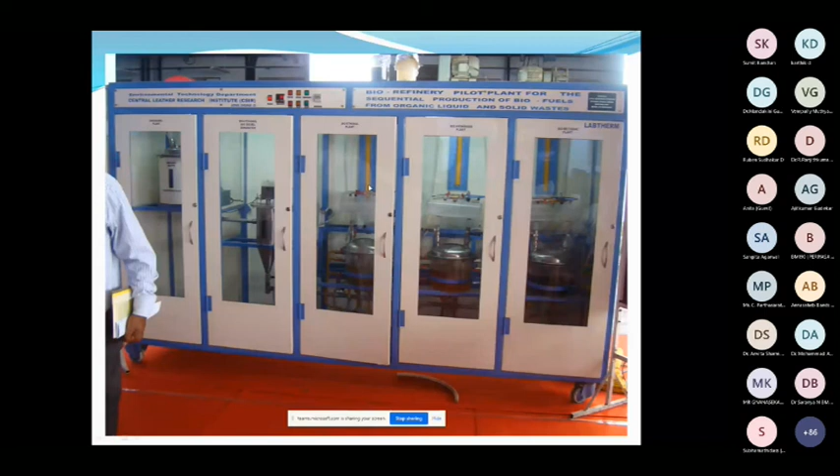This is the total biodiesel plant, our pilot plant, where biodiesel, bioethanol, biohydrogen, and methane are produced. This small pilot plant has wheels at the bottom so it can be transported elsewhere, and we can produce all these fuels for a pre-feasibility study or for preparing a detailed project report for any industries.

This is where we are testing the biodiesel plant. This is Mr. Thambiran, who did his MTech project under me producing biodiesel. Mr. Kandasamy and many other colleagues intended to produce biodiesel from leather solid waste. This is an Ethiopian who wanted this technology for biodiesel production, and they achieved it. These are some of the technical achievements.

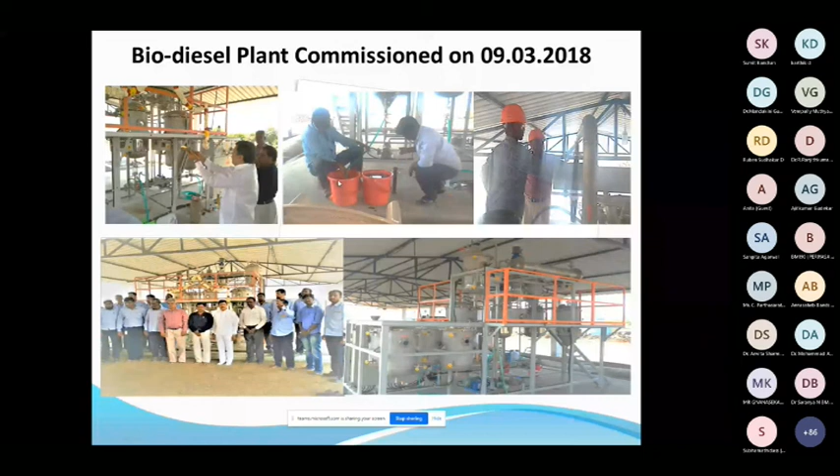These are the biodiesel plants. This is the inauguration of the large-scale biodiesel plant, and this is how we are testing and carrying out calibration validation of the plant. These are all the actual biodiesel plants existing there.

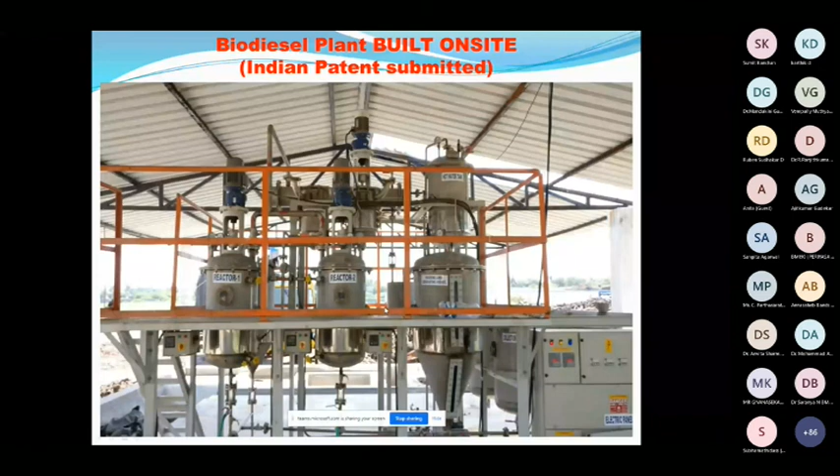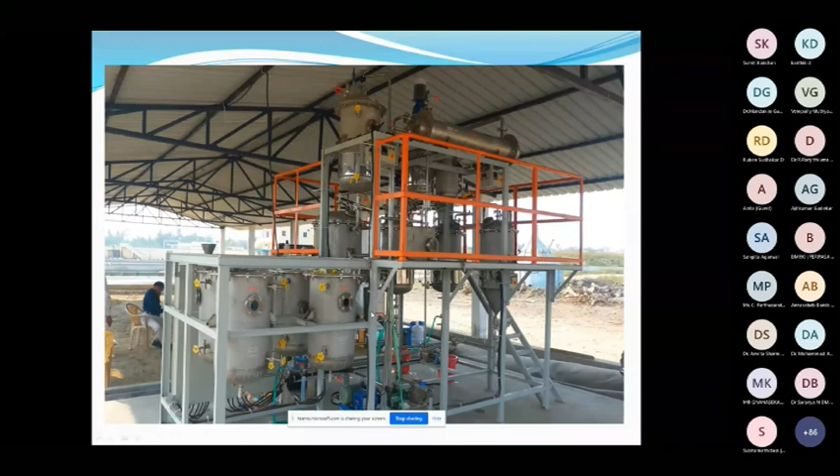This is the biodiesel plant actually built on-site at Ranipet. This is the biodiesel plant, again the biodiesel plant. This is the waste, showing how the fleshing waste is there from which we produce the biodiesel. This is a biodiesel plant, and this is the fat recovery unit.

This is the bioethanol plant that we have built. Leather fat oil is taken through transesterification, biodiesel and glycerol are separated out through oil extraction, and then the residue is taken for ethanol production.

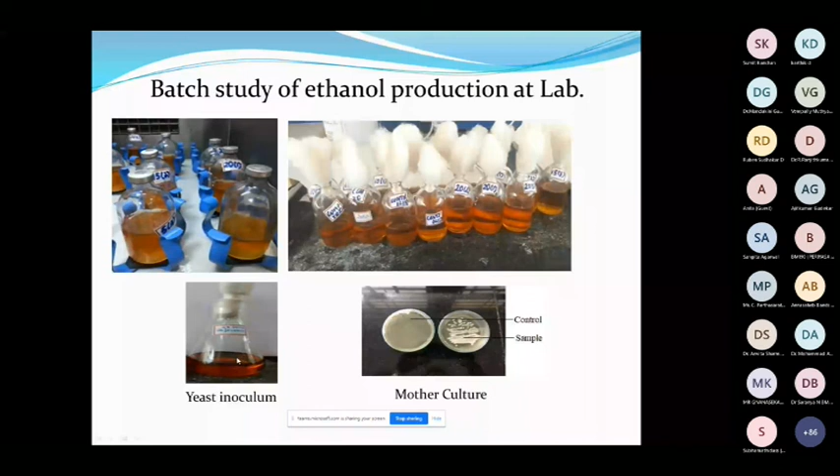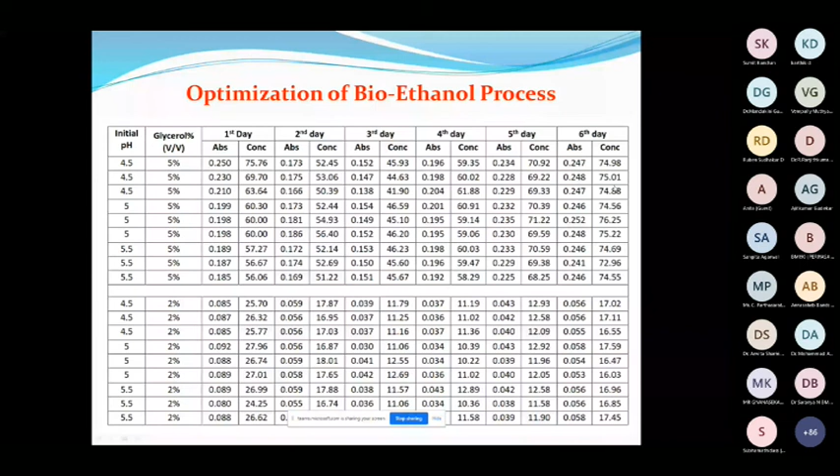These are the batch studies conducting ethanol fermentation at various operating conditions of pH, temperature, and seed inoculum to substrate ratio, showing how we controlled the process and obtained bioethanol samples. We also added some yeast inoculum. This shows glycerol versus biodiesel and bioethanol recovery across the first, second, third, and fourth days. Ethanol recovery concentration reached 74% starting from 0.18%, so we optimized the bioethanol process in the laboratory.

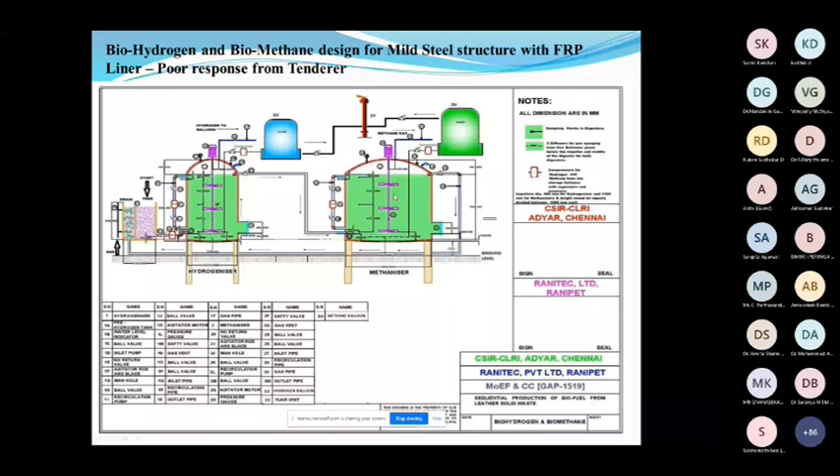And this is the methane production plant for producing methane, along with some of the recovery systems.

Yes, these are all the tasks that we have achieved on the bioethanol, hydrogen, and methane plant. And these are some of the testings that we have made, and we have used our biodiesel in our director's car successfully. We have operated it, made the limitations, and understood them.

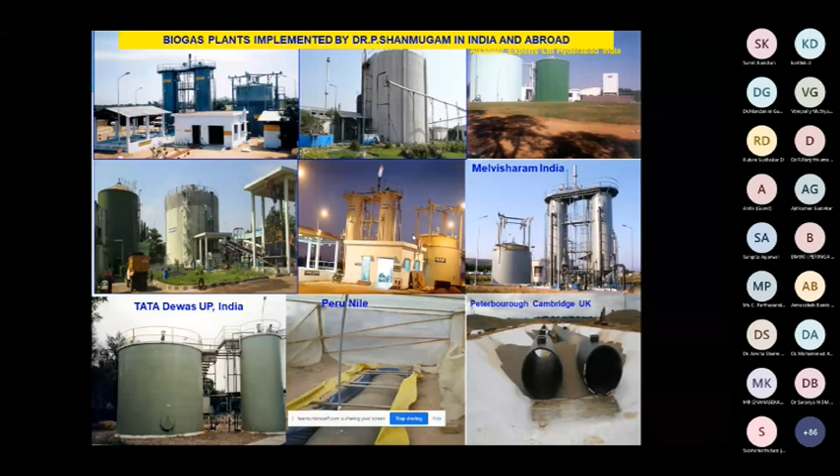Finally, we have been able to demonstrate this plant even for the Ganga Action Plan, the solid waste management at Kanpur, taking both sewage sludge and the solid waste of tanneries. This plant was shown and demonstrated to our Honorable Prime Minister at Vigyan Bhavan in New Delhi, showing how biogas to electricity, biofuel technology can be adopted as part of the Ganga Action Plan.

This is some of the biogas plant built at Peterborough in Cambridge. I wanted to show you community digesters for small villages. There can be horizontal digesters where village people can use them for lighting or street lighting from their cow dung or domestic waste. A community biogas plant can be built at very low cost, not just a hi-fi automatic plant. A small community digester can be built and operated successfully for villages, agricultural farmers, or domestic use in an apartment or elsewhere.

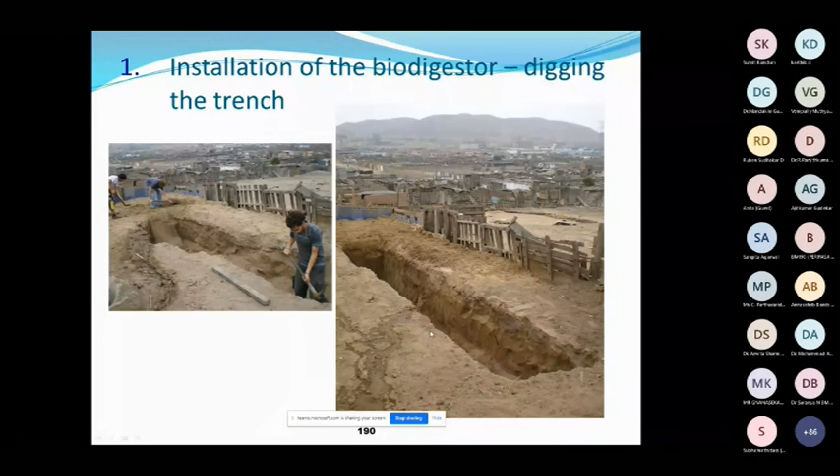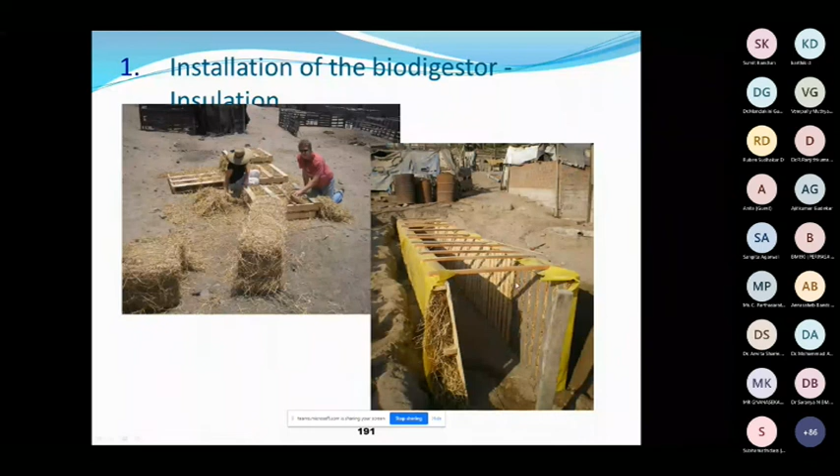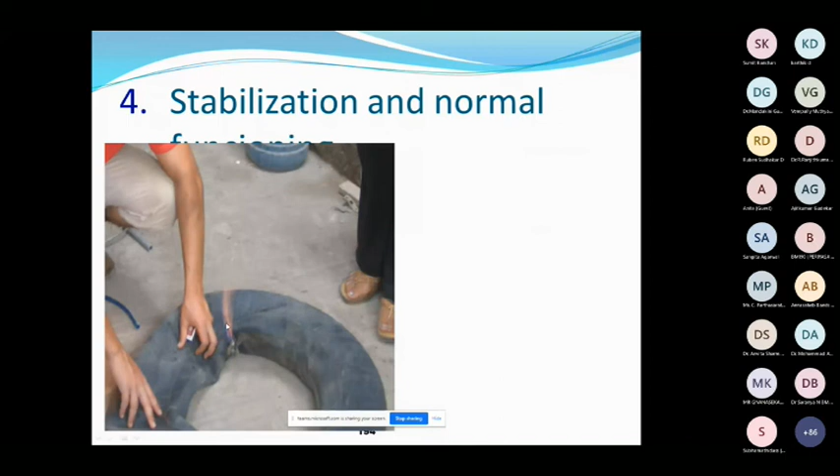This digester is built nicely for a cold country by putting straw on the inside and doing concretization outside. We can build the digester like this. This is the horizontal digester, and you can see the gas holder on top. The digester is closed completely here. There was a hole and the gas holder was connected and mounted on top. The gas produced is stored in a balloon and taken through a pipe for cooking purposes - the pipe can even be collected through a lorry tire. There's a small tube where you can see the biogas burning, which can be used for cooking in villages.

So that's how I really wanted to present to the participants today. I think it's 12:45 now, and I would like to conclude with my sincere thanks to the participants, and also thanks to Dr. Premalata Madam and Dr. Rupan who coordinated this program. Thank you very much.

I would like to take a few questions. Anybody interested in this bio-CNG plant - we have converted biogas into bio-CNG and put up plants in Abohar, Bathinda, Rohtak, and many other places in India. Those interested can come forward if you want to conduct a training program for municipal engineers of your state, or if you want to put up a large scale 100 or 200 tons per day biogas bio-CNG plant in your state - I can help coordinate that for cars and buses. I've also been involved with the Bureau of Indian Standards to develop a biogas standard manual on the design, commissioning, utilization, and operation of this plant as an Indian standard. I hope within a month or so the manual will be released for the whole solid waste management community on biogas into bio-CNG as automotive fuel.

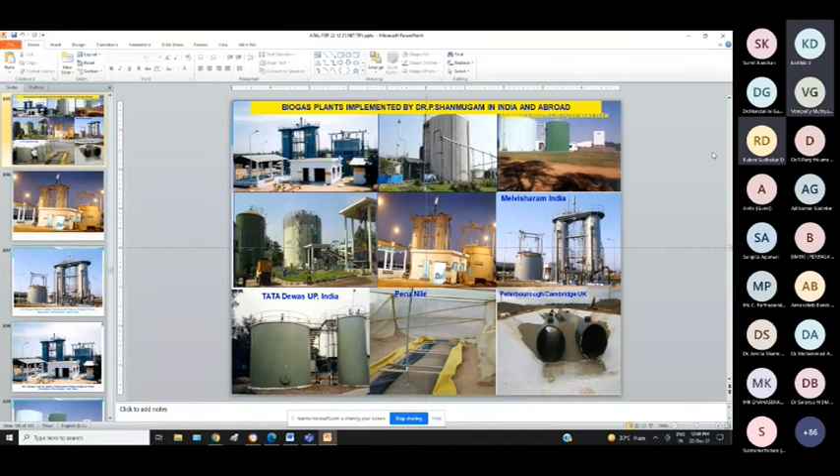It's a very insightful presentation, thank you, thank you very much madam, thank you sir. Indeed it was a very detailed and elaborate session. You have shown us a lot of real-time implementation and how far you have taken these biogas plants. You have contributed a lot to the penetration of this technology, and it's indeed very impressive to see, sir. Thank you very much for your time. Wonderful lectures, thank you very much, Doctor. Thank you, thank you, thank you.